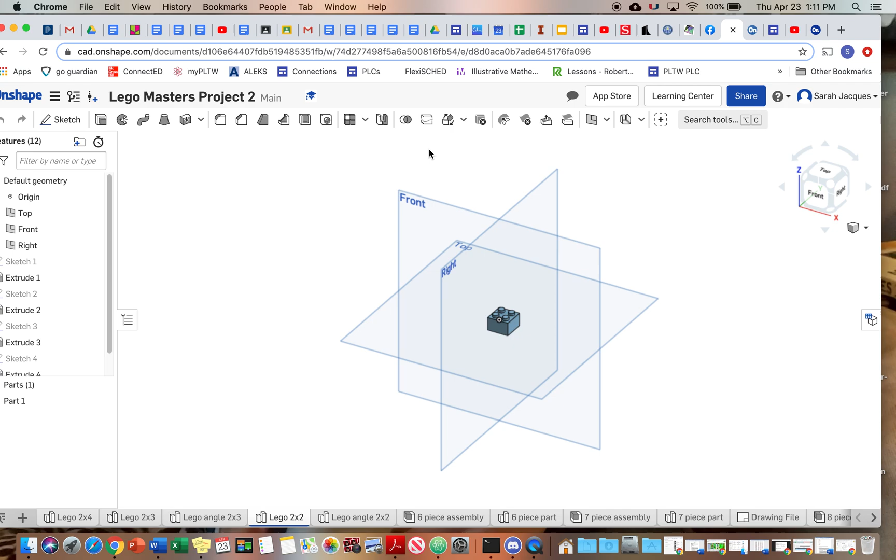All right, so you need to make a new folder and call it Train Project. You can see mine here. And then within that folder, you're going to create a document. I'm going to call mine Train Project Videos. You should just call yours Train Project, but I already have one called Train Project, so. Okay.

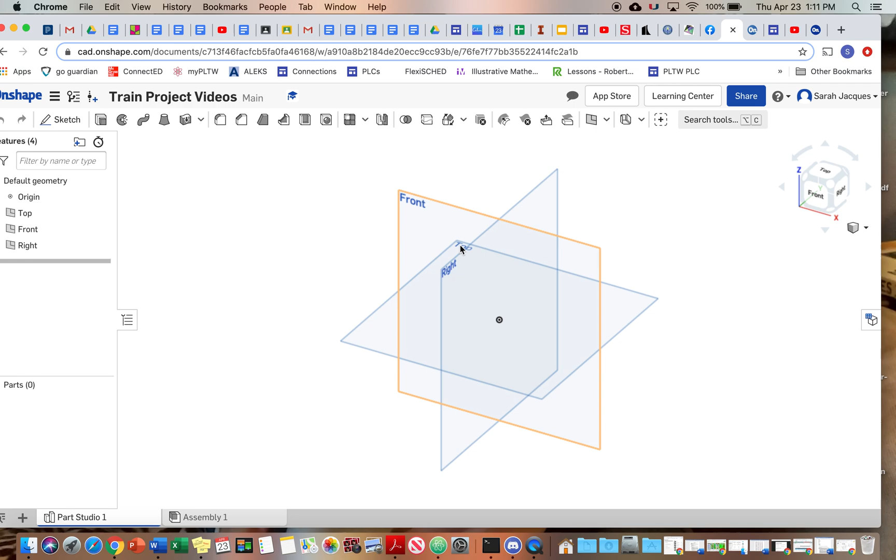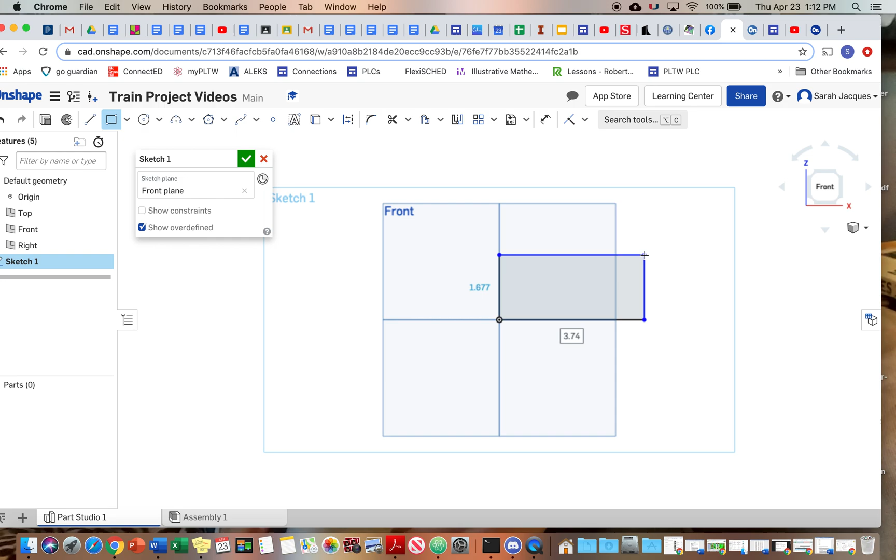So we're going to start a sketch on this plane, and I'm going to view normal to sketch plane. I am going to start by sketching out the front of the train body. So let's make a rectangle. It looks like this rectangle should be 2 by 0.875. Okay.

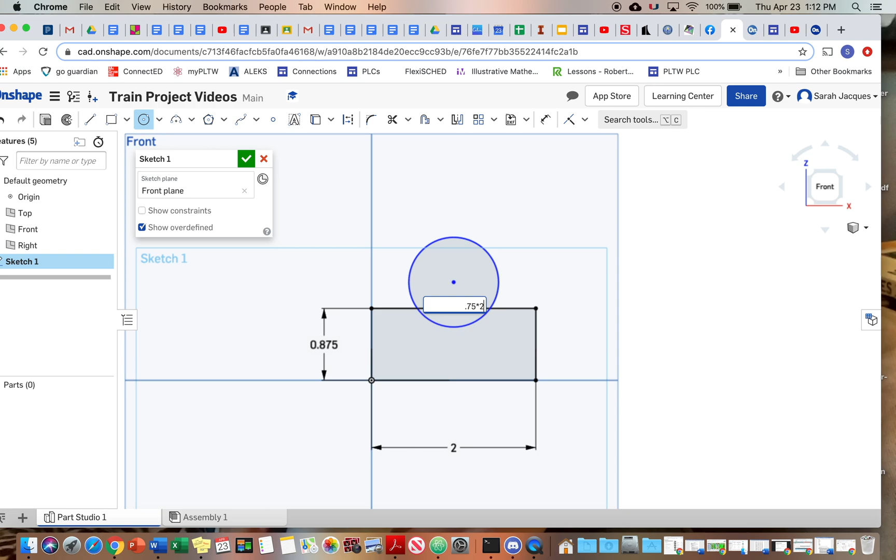And then I'm going to sketch a circle. It says the radius is 0.75. Circles are dimensioned by their diameter, though, in Onshape, so we're going to do 0.75 times 2 to get the diameter. Okay, and then it looks like this circle is 1.375 from the bottom, and we want it to be 1 inch from the side. Oh, wow. Nice. Okay.

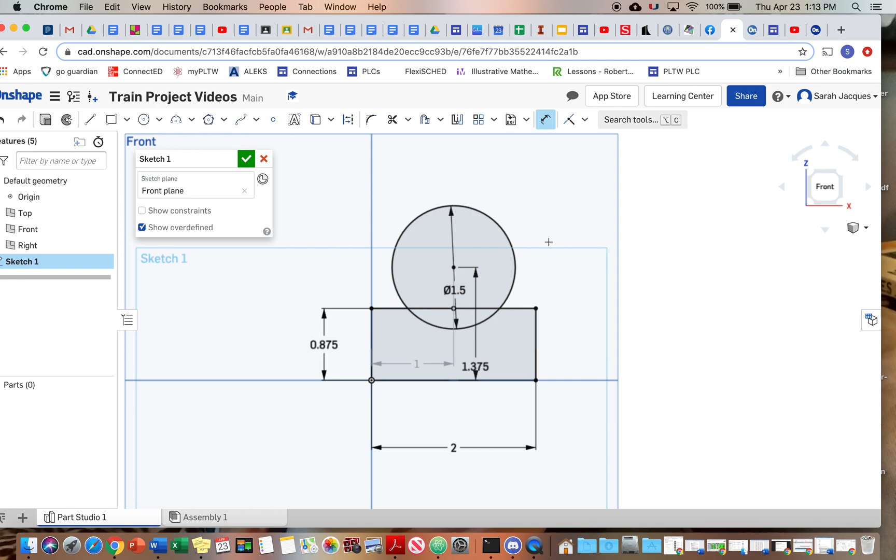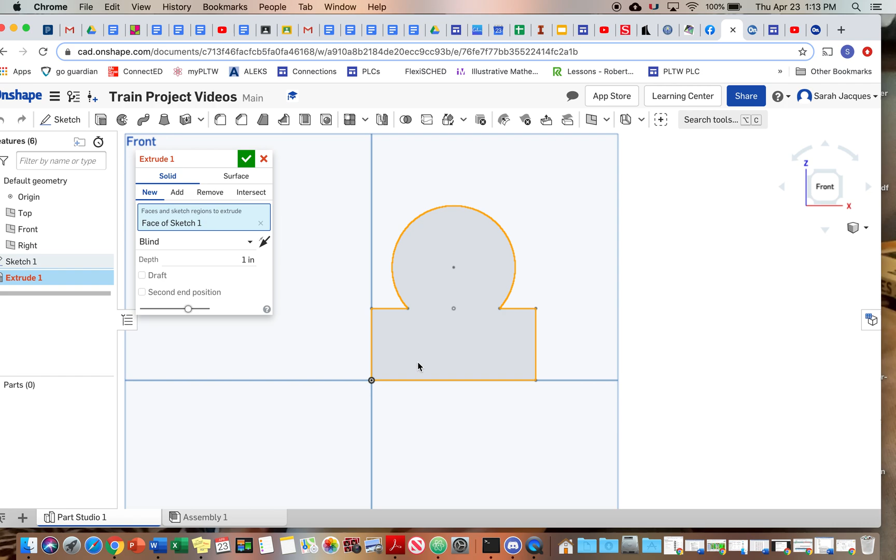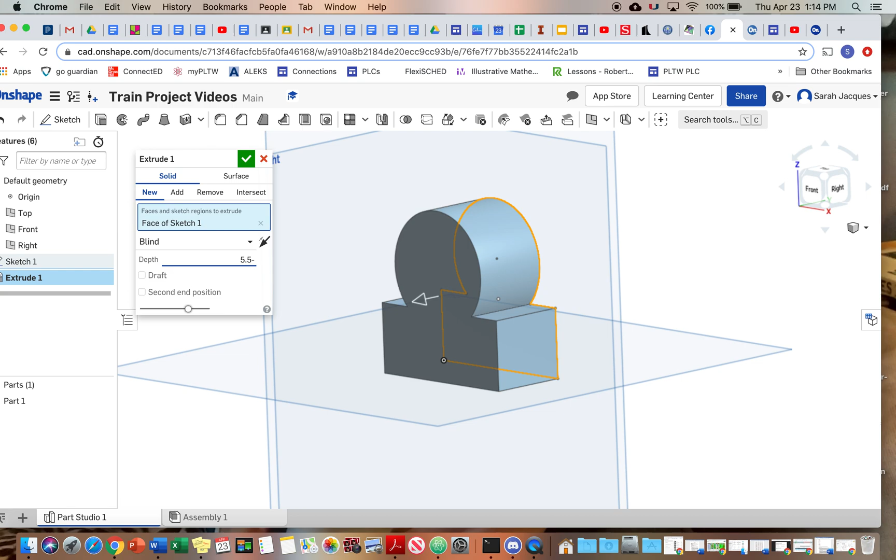And then we need to trim. And then we're going to extrude this. And we need to extrude it... see, the whole train is 5.5. And then we're just doing kind of this front part of the engine, and the back is 1.75, so we're going to subtract 1.75. Okay.

So that's kind of the front, and then on the front, I'm going to start a sketch. View normal to sketch plane. And I'm going to do those holes on the front there. So use the point tool. I'm just going to put 3 points on here, and I'm going to dimension these points.

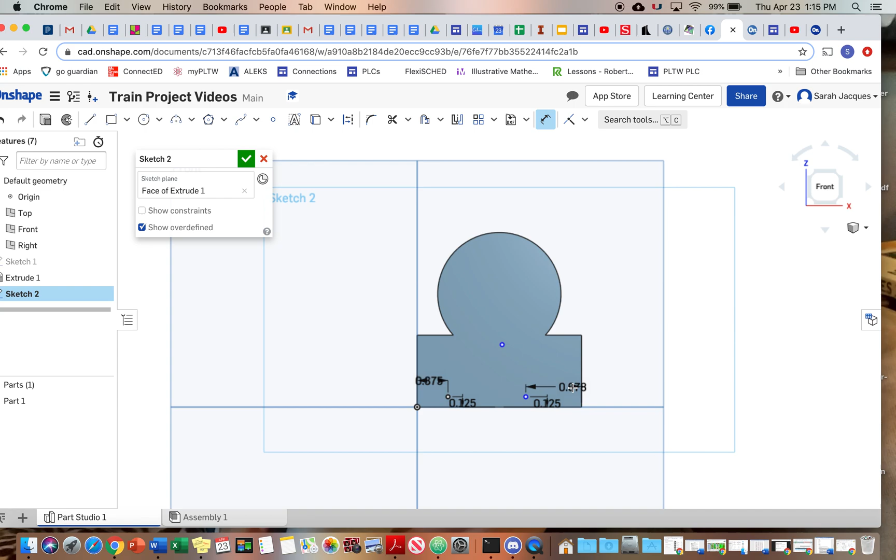So it looks like this should be 0.125 from the bottom, and then 0.375 from the side. 0.125. It's also 0.375. And then this point should be in 1 inch from the side, and 0.625 from the bottom.

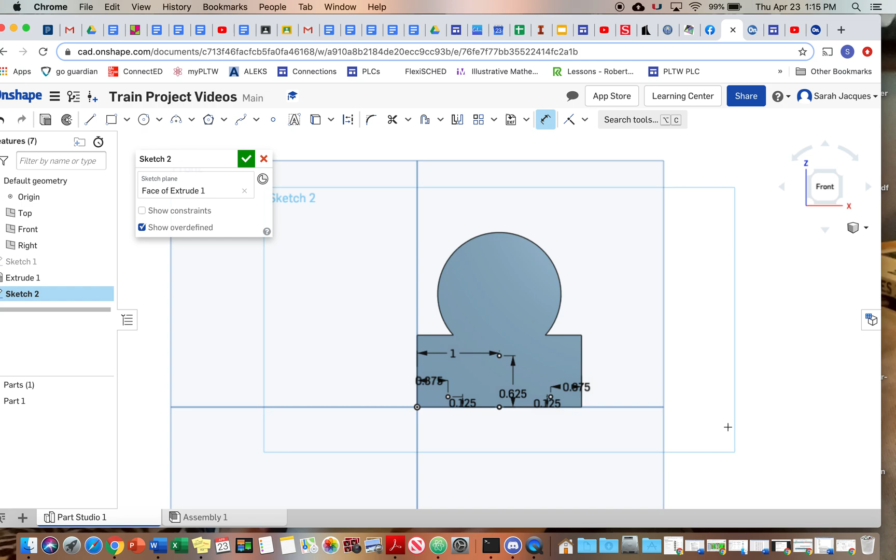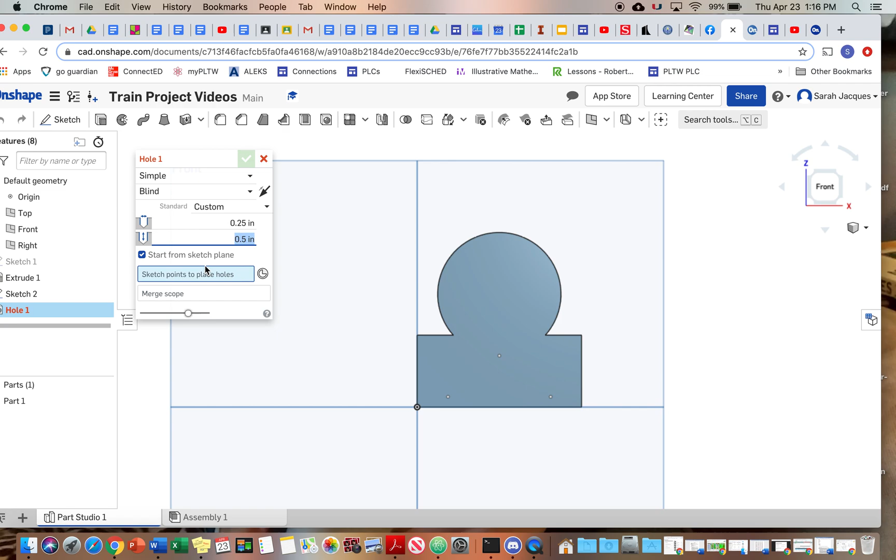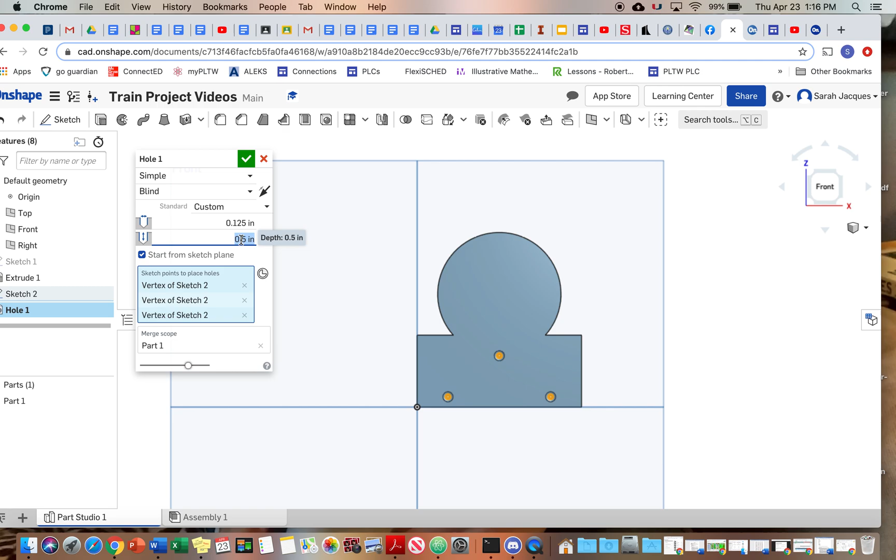Okay, finish the sketch, go to the hole. We want it to be blind. Just keep it at custom. It says that they're all drilled with pointed angles on the PowerPoint, which is good because that's how this is. I don't even know how to not make this pointed. But let's select our holes. And if you look at it, they're all a diameter of 0.125, and they are a depth of 0.5. Okay.

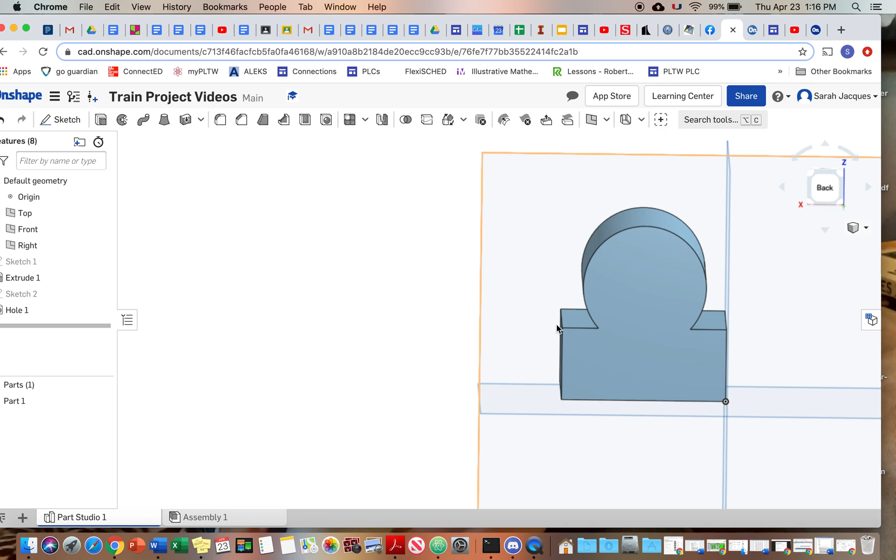Now we need to do the back of the train. So if you're using a mouse, you can just use the right click, and that's how I'm rotating this. Otherwise, you can use the cube here. We want to start a sketch on the back. View normal to sketch plane. Okay, so you need to look at the back of this. So we need a point.

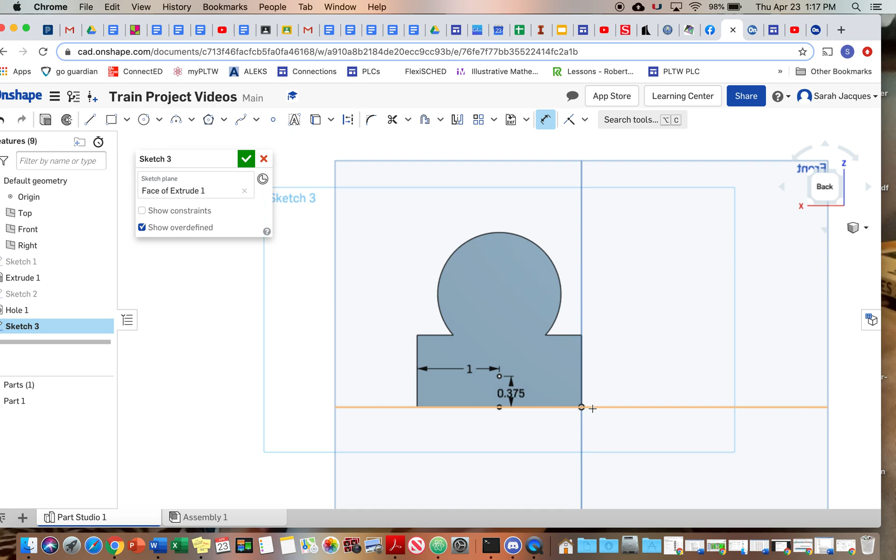And I want that point to be 1 inch from the side and 0.375 from the bottom. And then we're going to make a circle. That point is going to be our center point. And this circle, the radius is 2.35. So again, we're going to multiply that by 2.

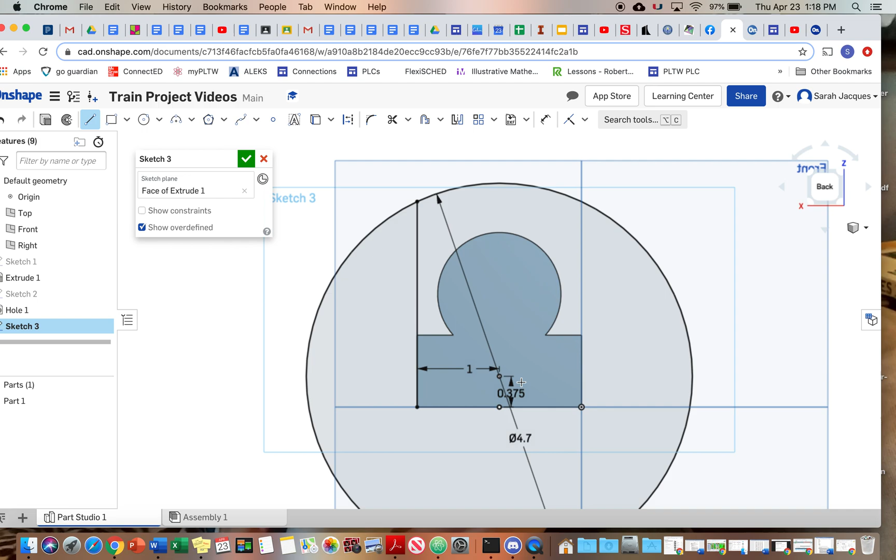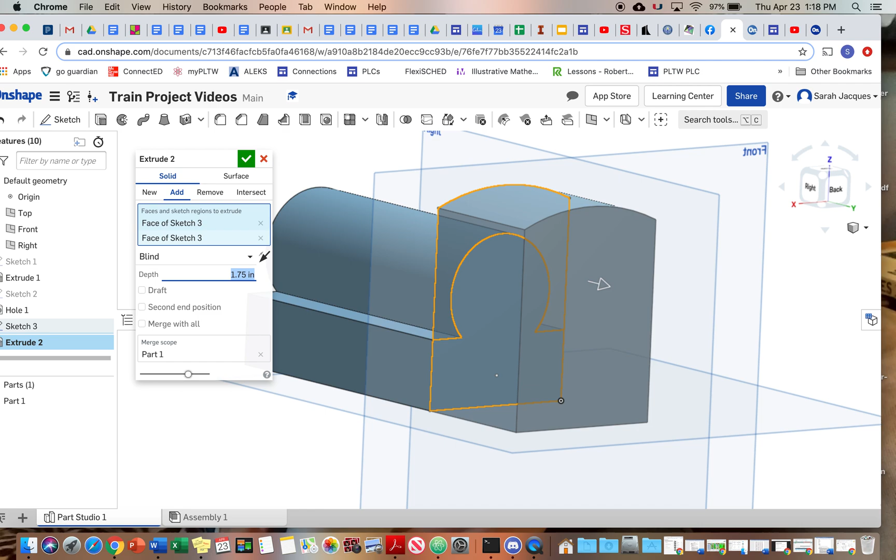Okay, and then we're going to use the line tool. Escape. And connect. And then we're going to trim. And now that's the sketch for the back of the train. We're going to finish and extrude. And we are going to extrude it 1.75. All right, cool.

Okay, now we need to add some holes. Let's start a sketch on this face. Use the point tool again. Okay, first I'm going to dimension this point before I do anything. So it looks like this point is 4.5 from the back and 0.5 from the bottom.

Okay, now I want another point that's the same distance from the bottom. So by lining it up with that and dragging it over, I know that this is 0.5 from the bottom, so I don't need to do that. And then this should be 1 inch from the back. Okay.

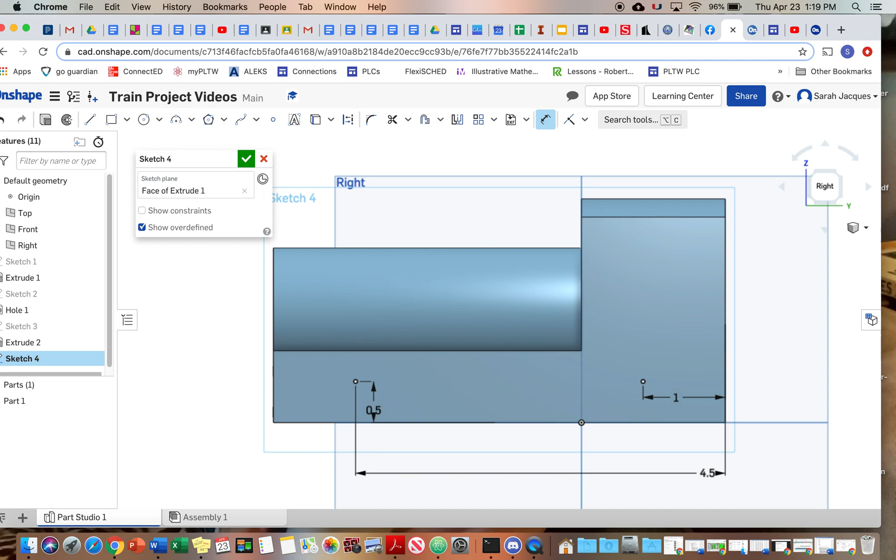Now finish the sketch, use the hole tool. These are the same. And this is going to be a... So technically this hole is supposed to be tapped. And we could go up here and do ANSI, and then we could change it to tapped and select the threads per inch and things like that. But we're going to keep it at custom, and we're not going to thread it.

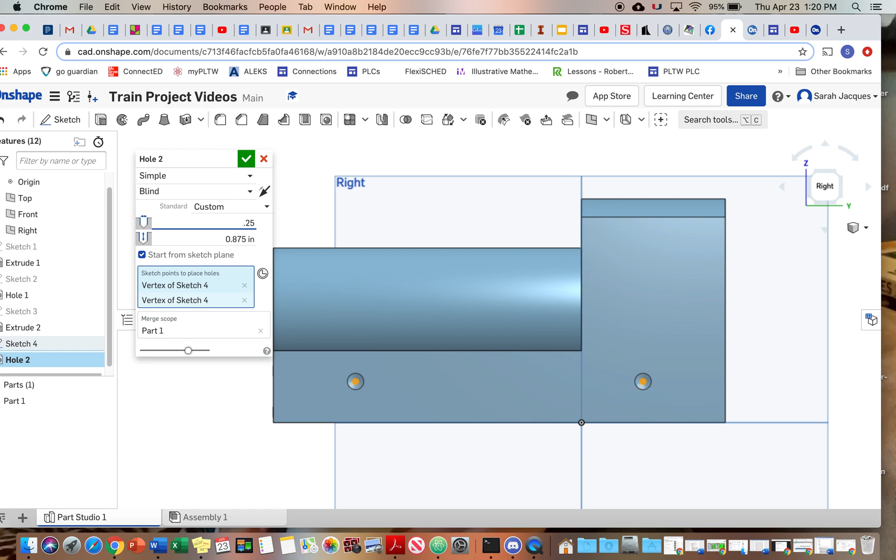So we're going to do a 0.25 inch diameter, that's what the 1/4 inch is, and then 0.875 depth. And finish that. Okay.

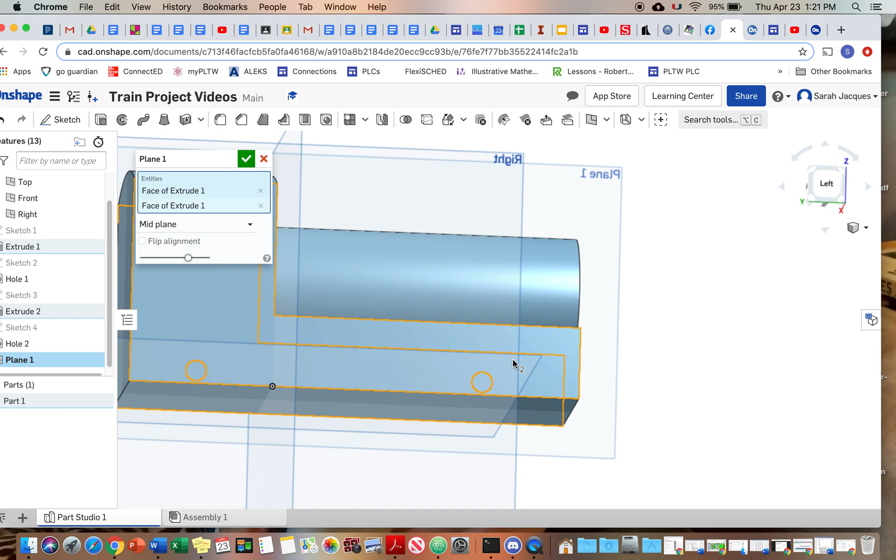Now we are going to get a plane, and we want a mid-plane between, you're going to click this side and this side. Okay. And then we are going to mirror.

Let's see. Oh, here we go. That's the problem, I remember. Okay. Up here where it says part mirror, yeah, there's the drop down. We want to do a feature mirror. So you need to change that to feature mirror, because we're trying to mirror a feature, not a whole part. So we just want to mirror these holes.

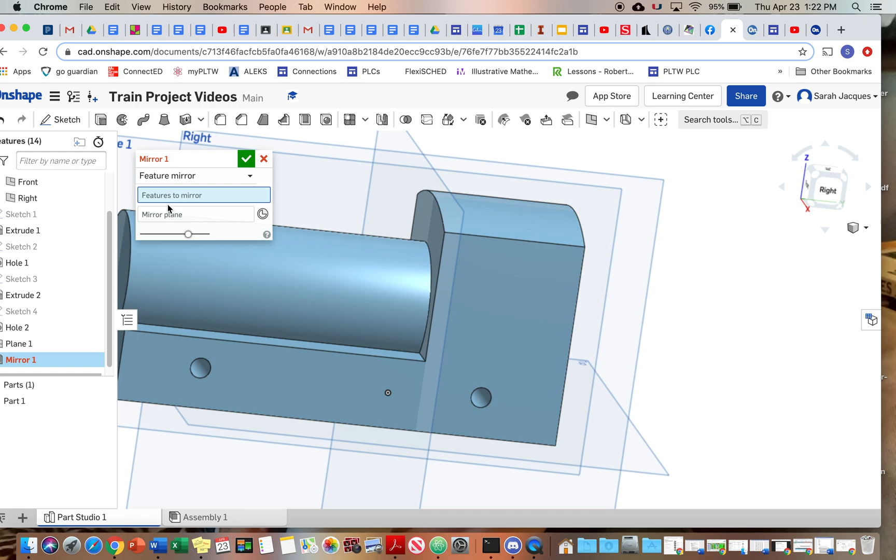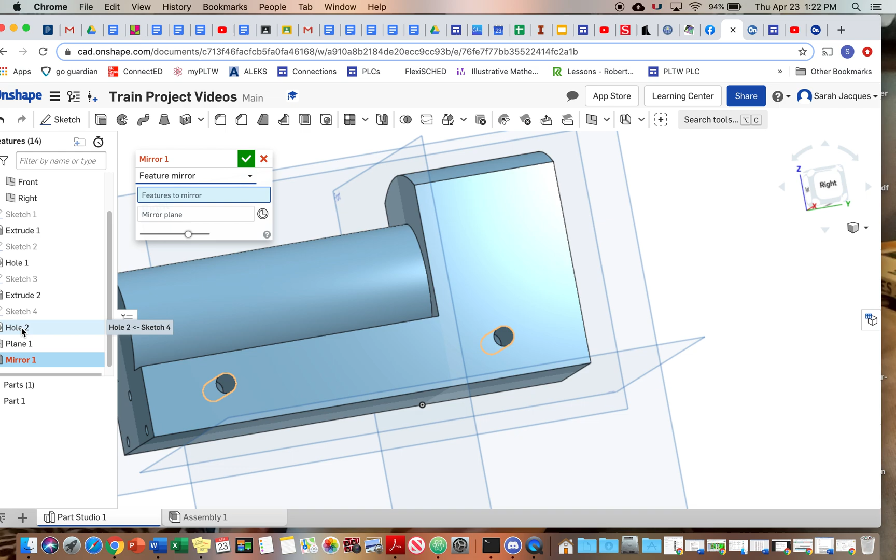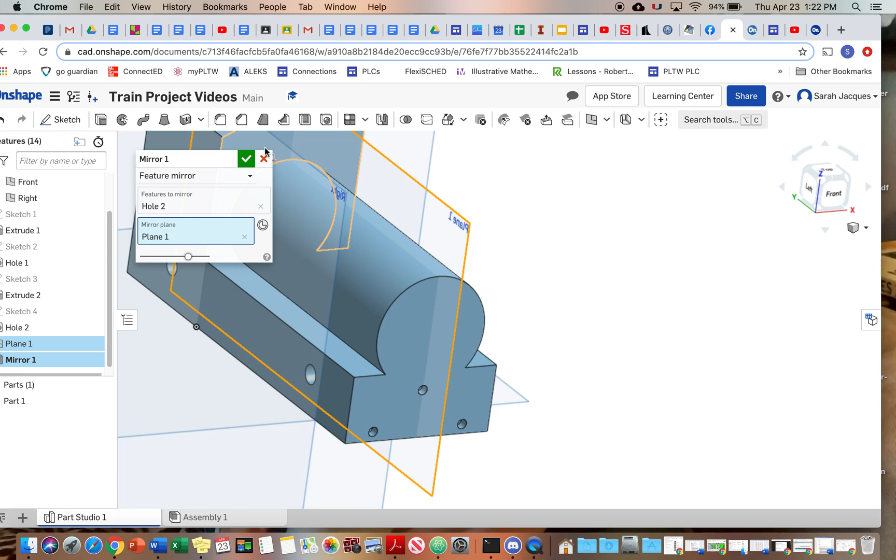Okay. And then change it to, oh, okay, let's try this again. Okay, change it to feature mirror. Instead of selecting the holes here, I'm going to select them over here in the browser. There we go. And then we want to select that mid-plane. Oops. Sorry, change it to mirror plane and select the plane. There we go. And now it's mirroring it. Hopefully you got that.

Alright, so then I need to unlock my phone.

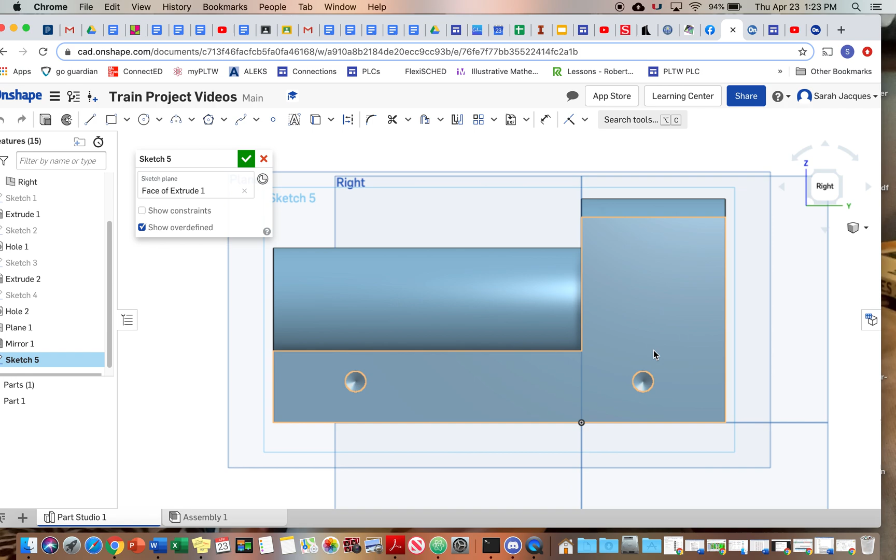Okay, so we got the holes. So now we want to start a sketch on this side. And we're going to view normal to sketch plane. Okay, we need another circle. So just make the circle somewhere. And it is a radius of 0.5. So again, we're going to multiply that by 2. The center of the circle needs to be 0.25 from the back. And it needs to be 1.75 from the bottom.

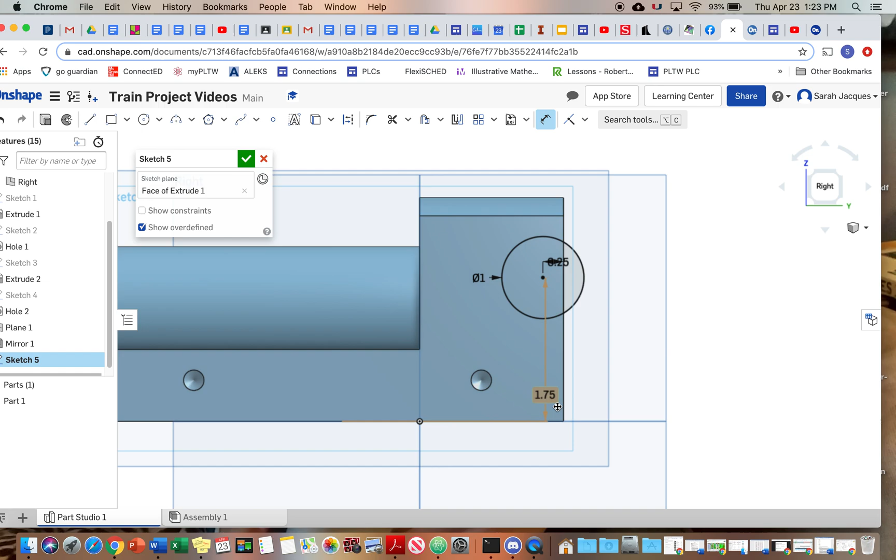And then we are going to use the line tool to connect. Just click the top of the circle to the back, and then hit escape and do that with the bottom of the circle to the back. Now we're going to use the tangent tool. So over here, next to the dimension tool are all these constraints. Tangent, so we're going to tangent this line to the circle, and again this line to the circle. And if we click over here, show all constraints, you can see that it's tangent.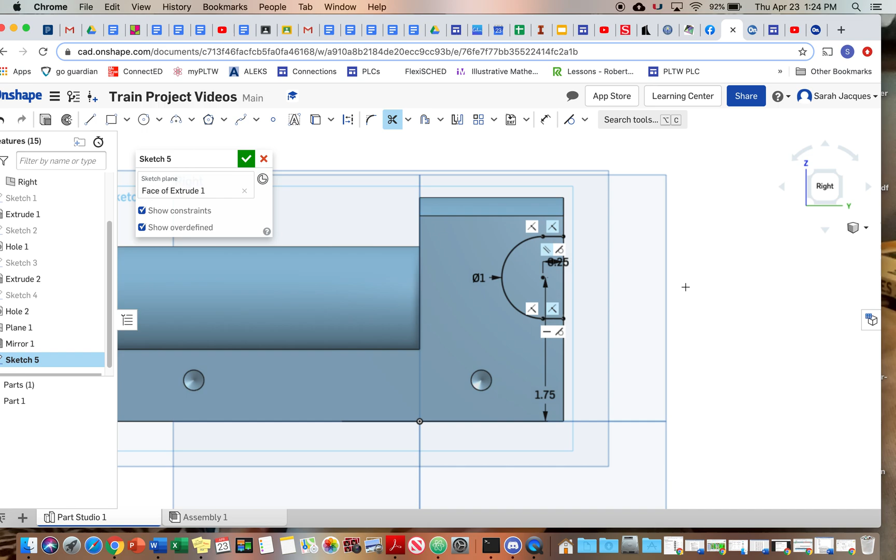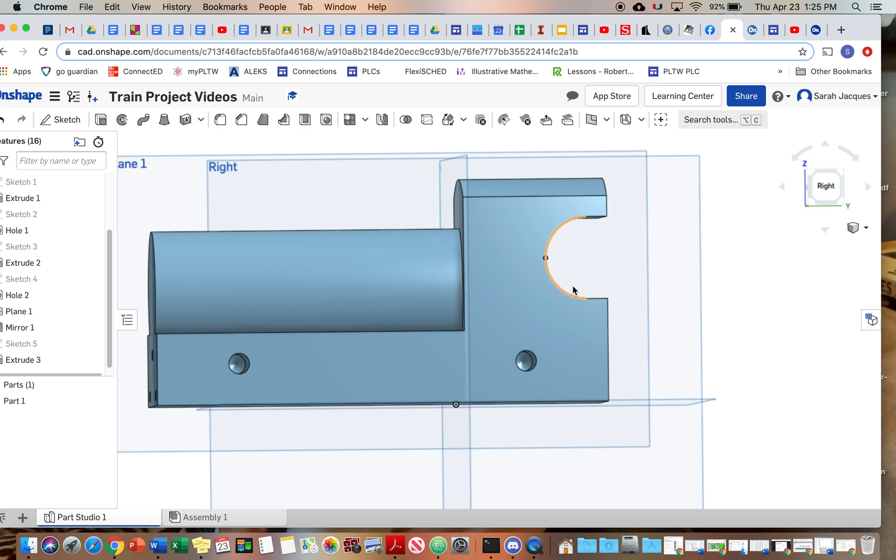All right, now I want to trim that part of the circle. Okay, and then we're going to finish the sketch and extrude. And we want to remove and through all. Okay. Last thing we need, oh, nope, 2 more things. We need a hole on the back. So we're going to start a sketch on the back. And view normal to sketch plane. Use the point tool again.

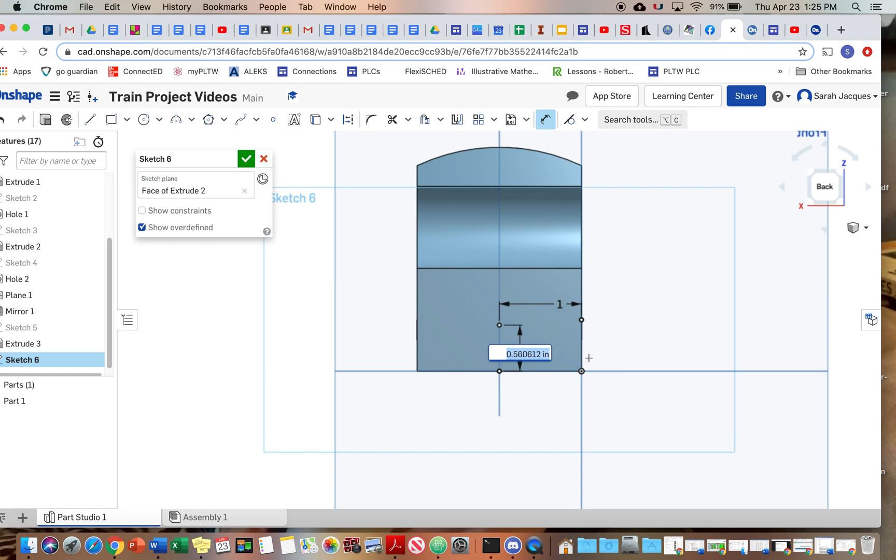And we want this hole to be 1 inch from the side. And, oh boy, lost my picture. And 0.375 from the bottom. Okay, finish sketch, hole. Looks like this is a 0.25 diameter, but 0.5 depth. Okay.

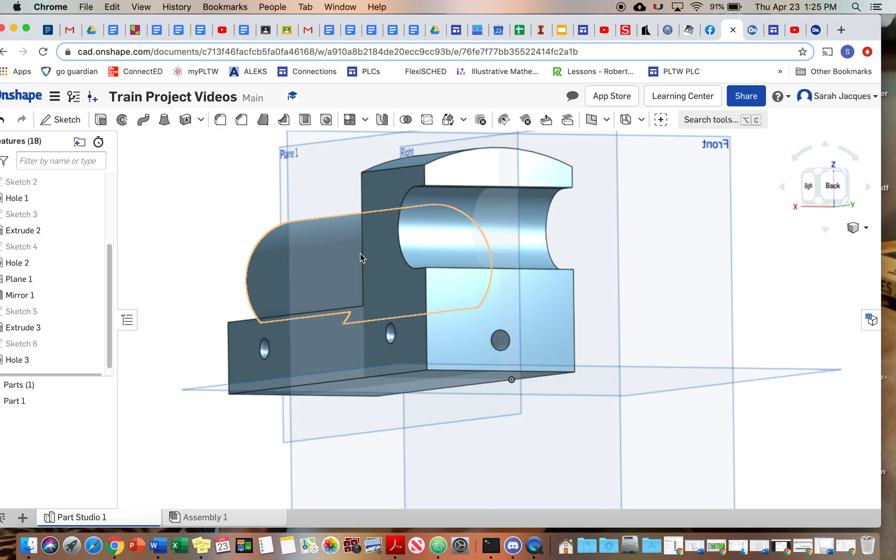The last thing we're going to do is, it says round all edges to a radius of 0.1 except for the drilled holes. So the last thing we're going to do is fillet basically everything. But we need the hole for the smokestack on top. So we're going to do a plane, and then we're going to do an offset plane from the bottom.

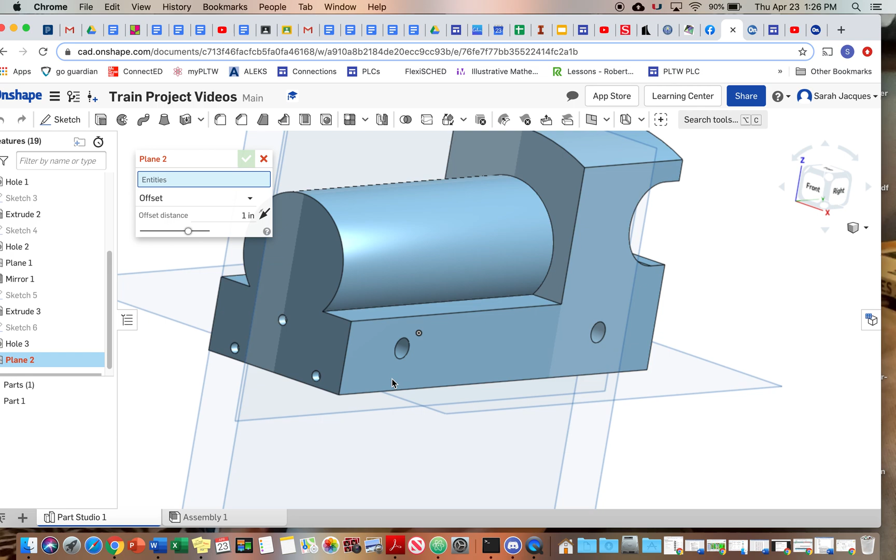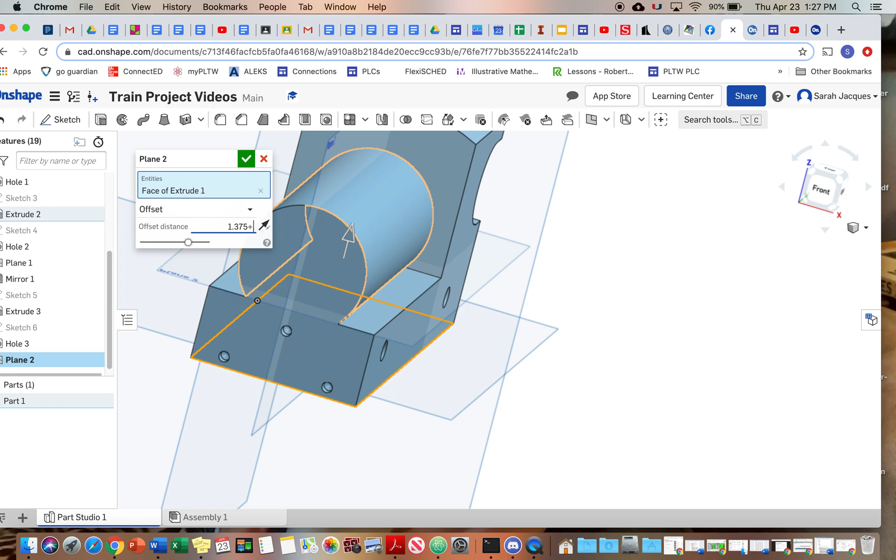Okay. So click the bottom. Mine is going down, so I'm going to change the direction to go up. And I need it to be 1.375 plus the radius of this engine piece, and the radius was 0.75. Perfect. So I wanted it to be tangent to this surface, which it is. If you look at it, it's tangent to the top there.

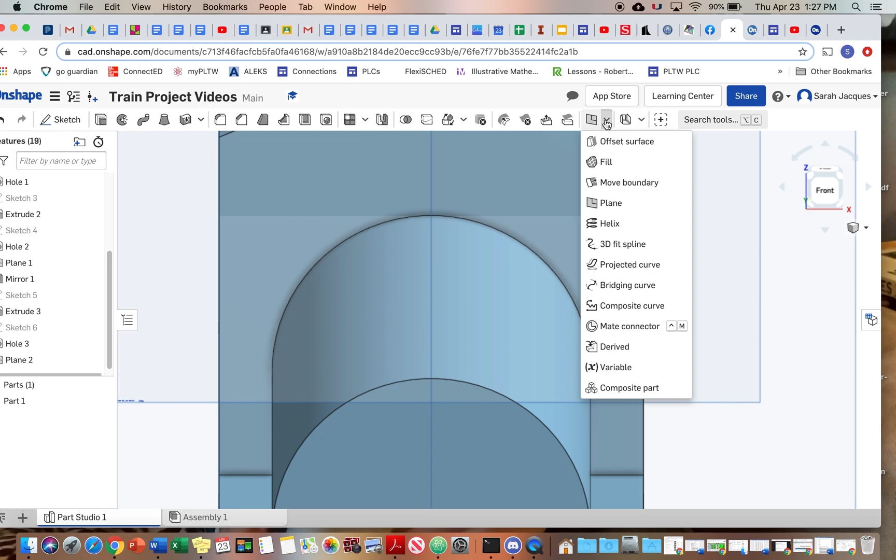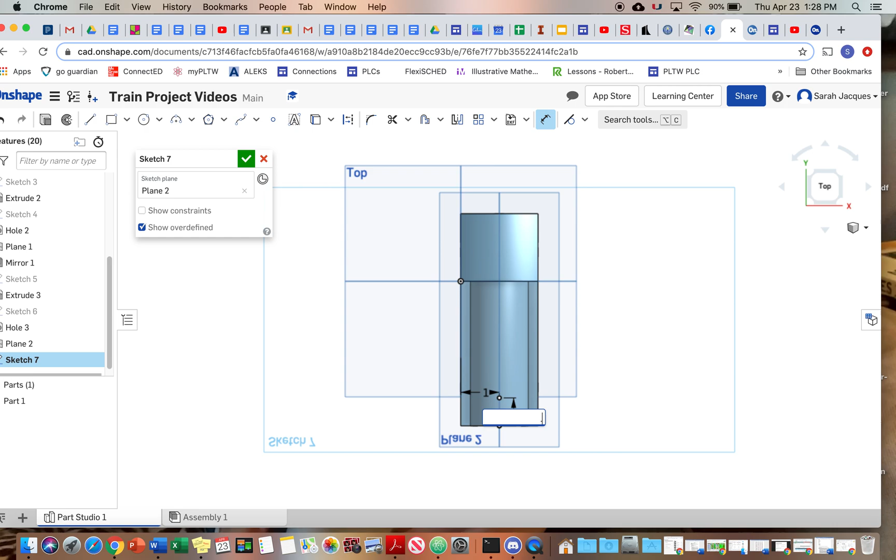All right. So the last thing we need to do is hit escape there. Okay. Start a sketch on this plane. And then we need to view normal to the sketch plane. And we're going to, again, use the point tool. All right. So we're going to assume it's centered. So we're going to put it at 1 inch over. Okay. And we're going to put it 0.875 from the front.

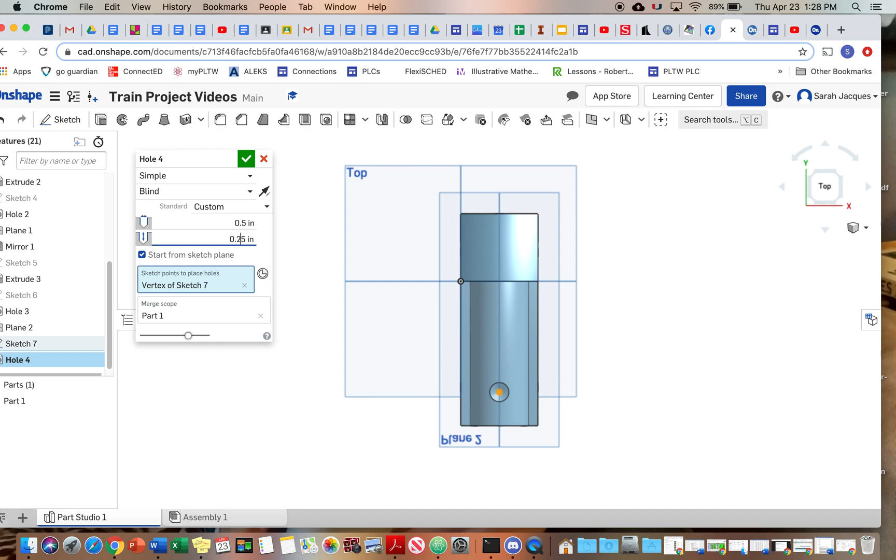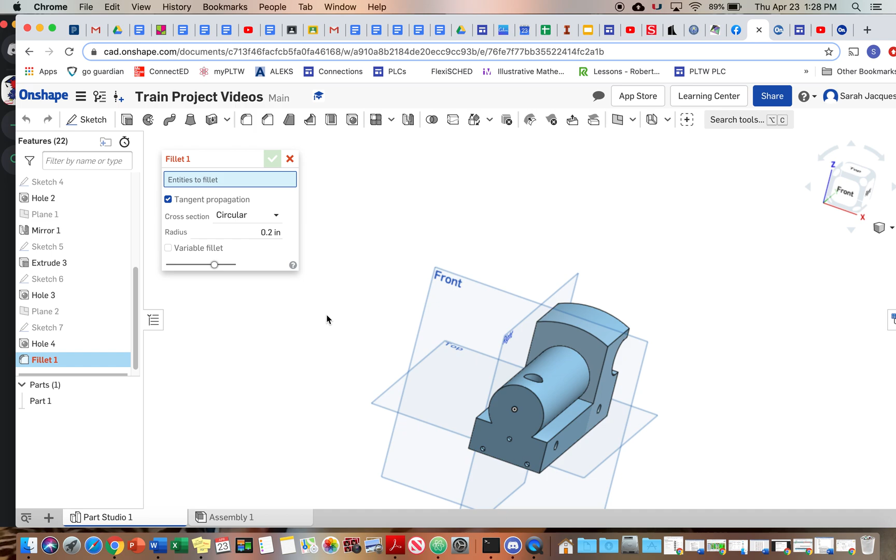Finish sketch, hole, and this needs to be a 1/2 inch diameter and a 0.25 depth. Finish. And there we go. I am going to hide some of these extra planes. There we go. Okay. And then we need to fillet everything except for the holes, like the outside of the hole. So we want the radius to be 0.1.

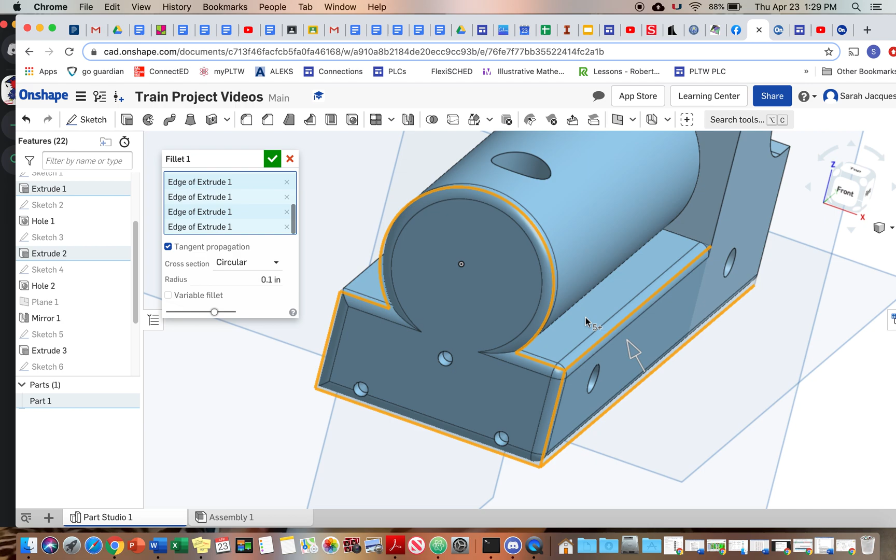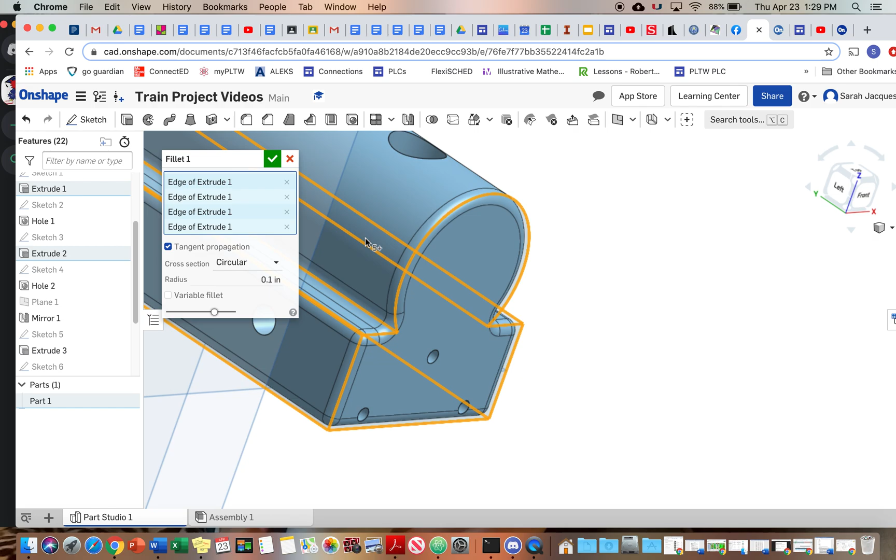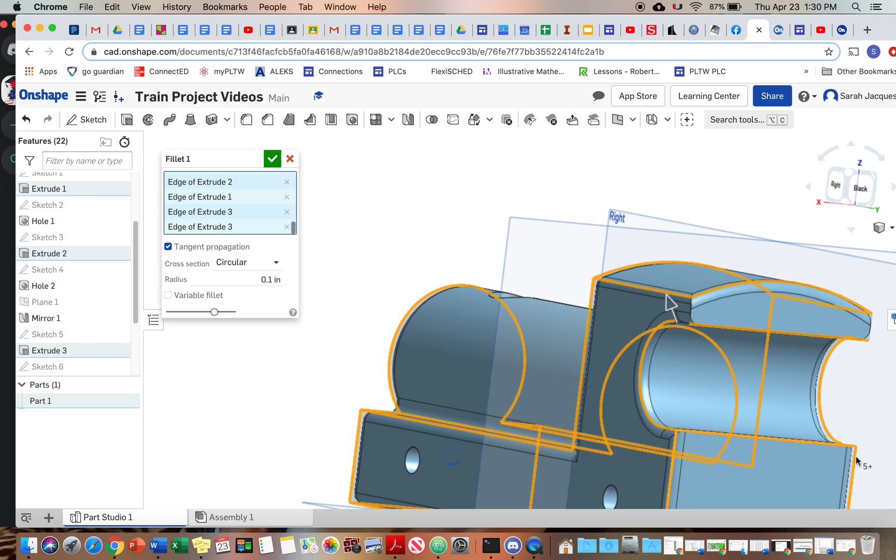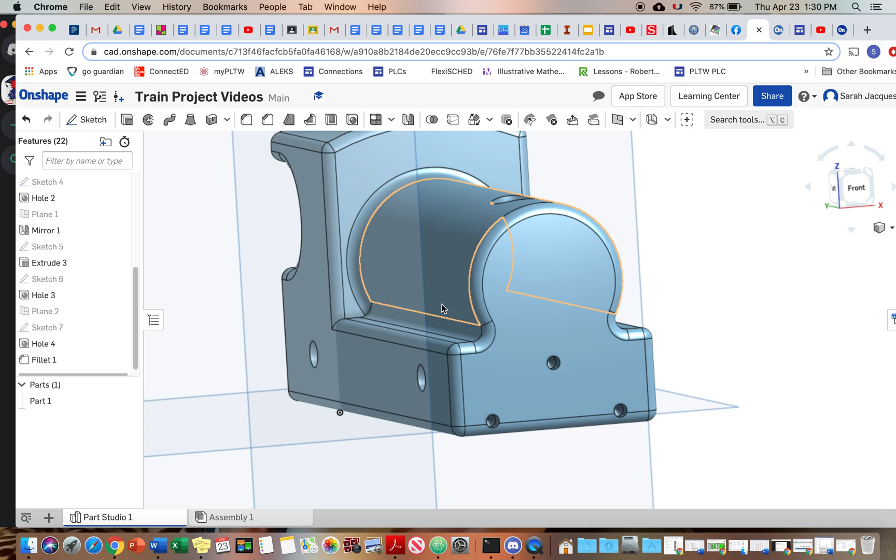And you're going to select every edge. Every single edge. I feel like I want, there we go. There we go. The nice thing is if you screw up, just hit the X next to one of these. Like in Inventor, you can undo as well. It's not as intuitive though. Okay, so, oh. Oh, jeepers, this is tricky to make sure you have everything. Okay. I think I got it all.

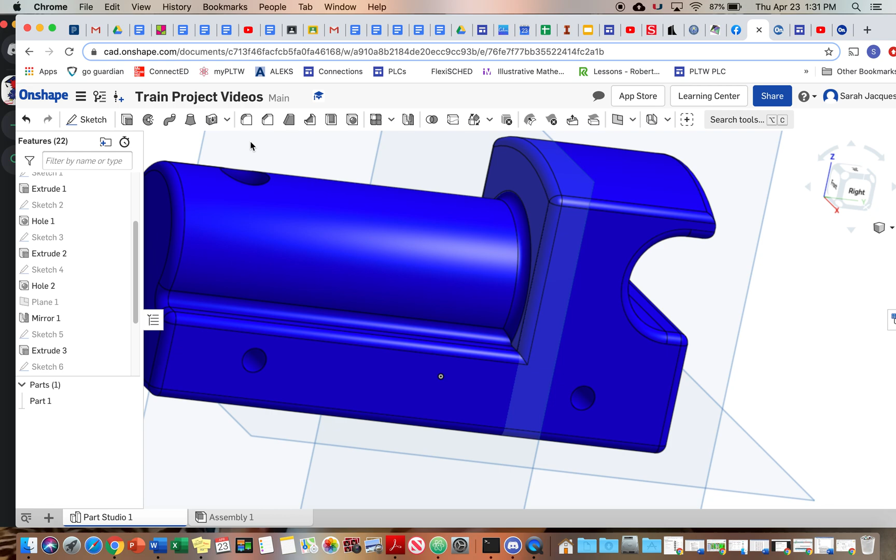All right. Last thing to do is edit the appearance, and I'm going to make mine South Dakota State themed, so I'm going to make my body blue. And then I'll make some of the other parts yellow, but feel free to do whatever colors you want. And there's the train body.